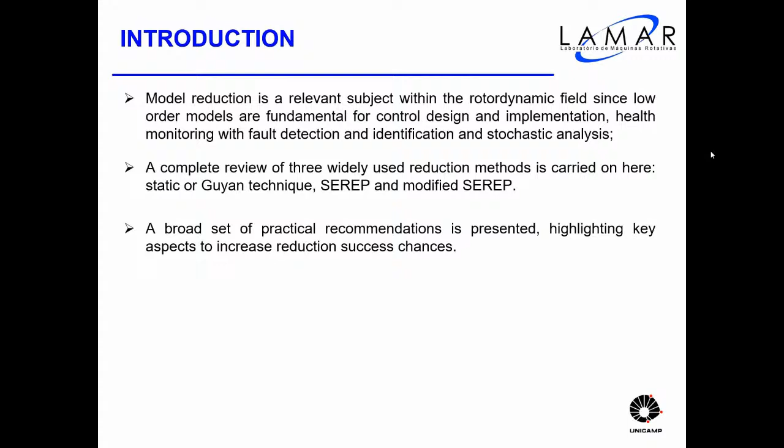Basically, I am going to briefly describe the rotor model by finite elements.

We have some well-known components that are discretized in this methodology. We have here a disk element, usually used to represent gears and blade sets, rotors, and big rotors. This component has 4 degrees of freedom because it's considered a rigid, lumped component. It has practically 2 translations and 2 rotations around these axes.

And we have the translation mass matrix, the rotation mass matrix, and the gyroscopic matrix, related to acceleration and velocity of this component. And here we have the applied forces on it.

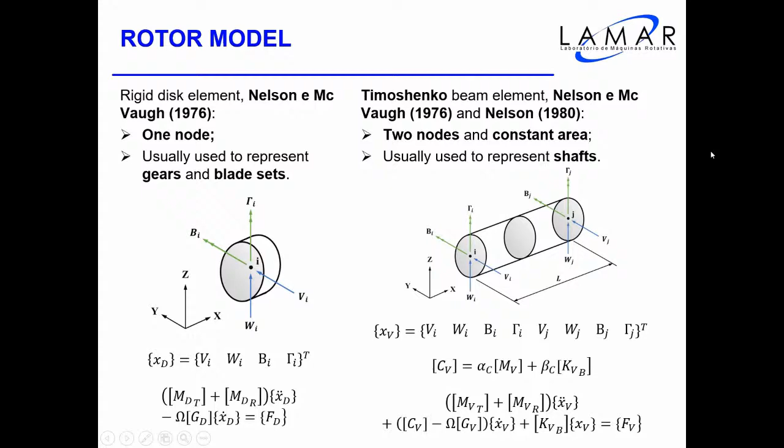Another fundamental component in rotating systems are the journal bearings, or hydrodynamic lubricated journal bearings. The solution of this generally nonlinear problem is obtained by numerical solution of the Reynolds equation. You can get this numerical solution by finite differences, finite volume methods, or finite element methods.

We usually apply the finite volume method developed by Patankar, according to the Maliska method in his book.

However, this kind of component allows some linearization depending on the machine interaction between rotor and bearing. So depending on the behavior of the rotor inside the bearing, you can get some linearization of the hydrodynamic forces, as proposed by Lund.

Then you can represent your lubricant film between the bearing walls and the shaft surface. Here we have the lubricant oil.

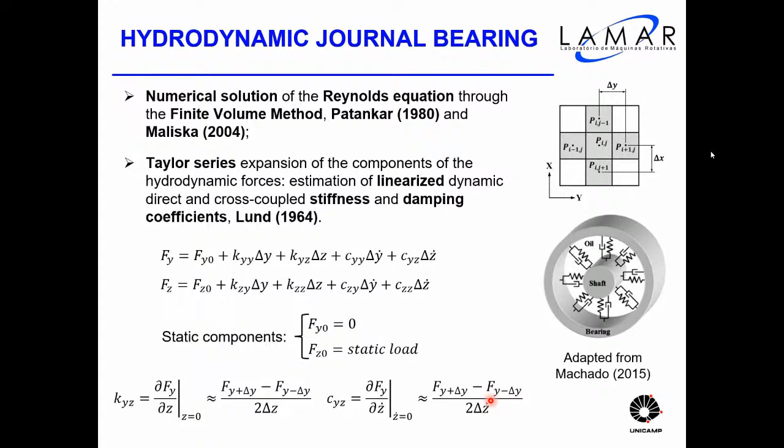Another important and crucial component that's not a rotating component, but is crucial in the modeling of rotating systems, is the foundation. It's composed of metallic parts, usually connected to others - these metallic parts can be of different materials - and usually they are connected to concrete parts. So it's positioned and fixed on an inertial system, an inertial structure.

And even if we can do a very detailed modal analysis of this structure and even obtain its flexibility matrix, as shown here - that is the inverse matrix of the impedance matrix - with mass, damping, and stiffness characteristics of the foundation.

The degrees of freedom that can be sensed by the bearings, mainly the oil film into the bearings, are the translation degrees of freedom. Because in this case, we deal mainly with short and finite bearings, and not so much with long bearings. So the bearings can view or sense mainly the translation of the structure regarding the shaft position.

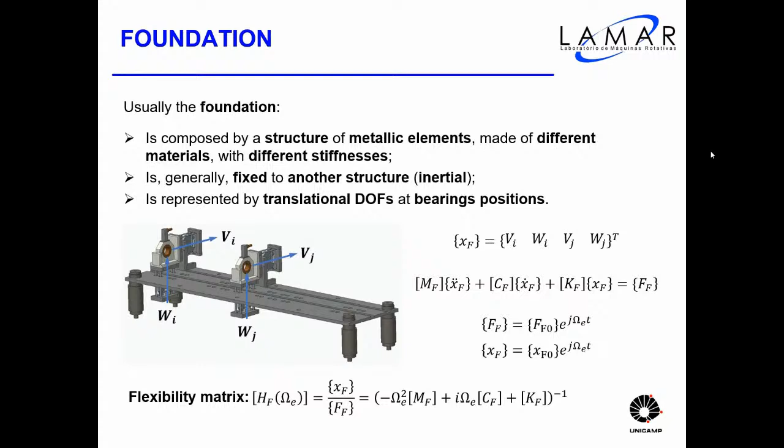In this case, if you have a low number of bearings, it's not difficult to identify a number of structural modes for the foundation equal to the number of degrees of freedom, and then obtain an easily invertible impedance matrix. However, when you have lots of bearings, a greater number of bearings, several rotors assembled in series, you can have problems identifying so many foundation modes as the degrees of freedom related to the bearings.

Practically the double of the number of bearings. So in this case, it's interesting to apply modal coordinates for the foundation.

And here it's a very well-known approach, by the modal matrix. These are physical coordinates and these are modal coordinates. The main contribution of writing the foundation in modal coordinates is to get uncoupled equations of motion of one degree of freedom each, one for each identified mode of the foundation.

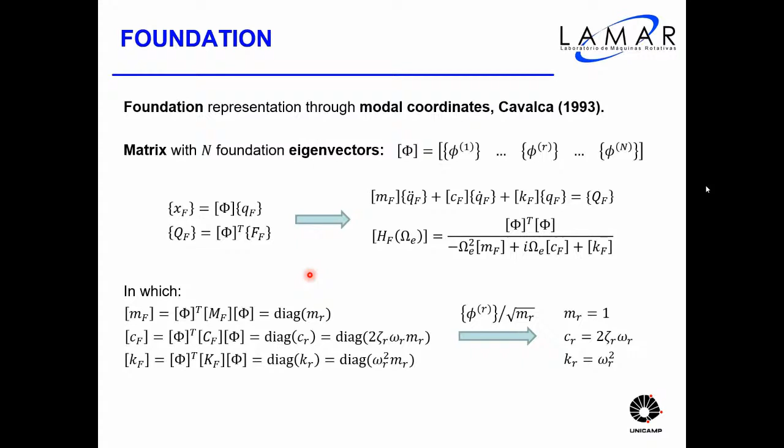Okay, here we have a schematic of a rotor bearing foundation system, complete system. Initially, we split this complete system into two subsystems: the rotor bearing subsystem and the foundation bearing subsystem.

Here we can clearly see the action and reaction forces that go from the shaft to the foundation, and then excite the foundation that returns vibration.

Through the oil film of the bearing, vibration travels from the foundation to the rotor.

Here we have the representation by springs and dampers, the linearized representation of the oil film of the bearings. And here we can see the rotor subsystem and the foundation subsystem, the inertial test rig.

And the main coordinates: axial coordinate X, vertical coordinate Z, and horizontal coordinate Y.

Rotor equation of motion: here we have the translation and rotation mass matrix, the proportional damping matrix, the gyroscopic matrix, and the stiffness matrix.

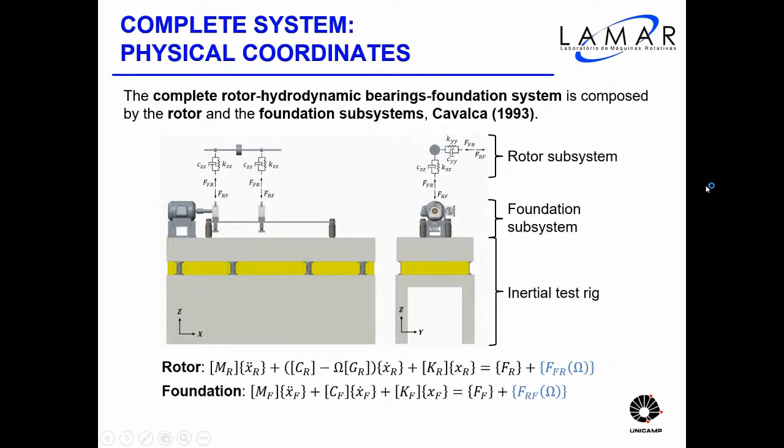The objective here is to obtain a unique equation of motion for the complete system: rotor, bearings, foundation.

So we must represent the stiffness, and analogously the damping matrix, with the translational coefficients, the linearized coefficients of the bearings.

Which means direct and cross-coupled coefficients, in both cases, stiffness and damping. And we have to connect...

...reaction, action and reaction forces through these coefficient matrices. So we have...

...actually, relative displacements between rotor and foundation and between foundation and rotor. So when we assemble these coefficients...

...in this way to represent the action and reaction forces, involving displacements of the rotor translational coordinates and foundation translational coordinates, as well as their velocities, and then we can relate...

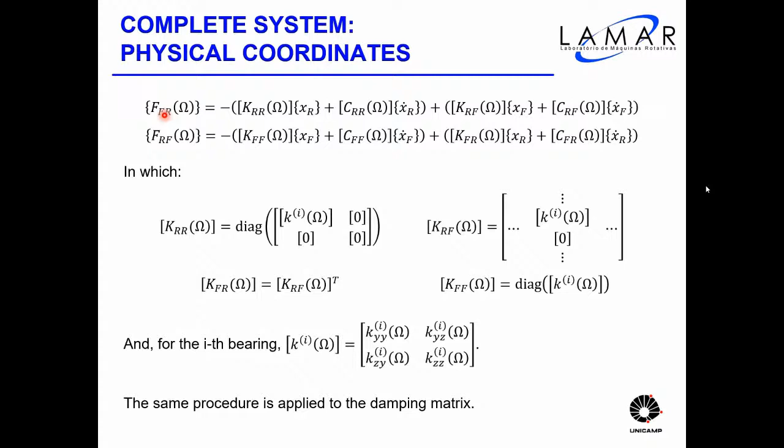After incorporating the respective stiffness and damping coefficients of the linearized oil film of the bearings, we can obtain a unique equation of motion of the complete system.

Its physical or Cartesian coordinates: 2 translations and 2 rotations per node in the rotor system, and 2 translational coordinates in the foundation system.

And then we have mass, damping, stiffness coefficients. This is not exactly damping, it's a velocity-dependent matrix, and the stiffness coefficients.

And here we have external forces acting directly on the rotor and directly on the foundation. However, here we will consider these external forces acting on the foundation to be completely null, so we work only with unbalance effects.

The mass, stiffness, and velocity-dependent matrices are expanded now, containing the rotor inertia, mass matrix, translation and rotation, and foundation inertia.

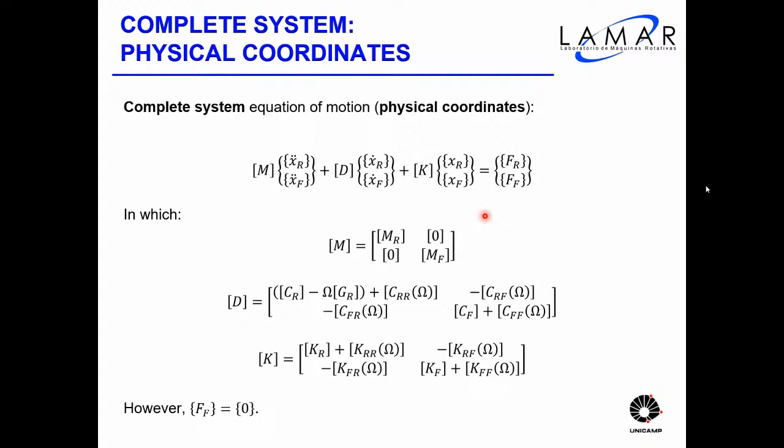Continuing from here, we have the modal approach for the foundation coordinates, physical coordinates, and external forces through the modal matrices. So here we have the generalized forces, modal coordinates, and also the relation between physical and modal coordinates to be applied in the general equation of motion of the entire system.

We will obtain this equation of motion in mixed coordinates, because they are physical coordinates related to the rotor, which are Cartesian coordinates for translations and rotations. And here we have modal coordinates that are related to the number of identified modes of the foundation.

The external generalized forces here will be null. We don't have external forces acting on the foundation, only transmitted forces by the bearings, included here as we can see by the stiffness and damping coefficients, equivalent coefficients to the lubricant film of the bearings.

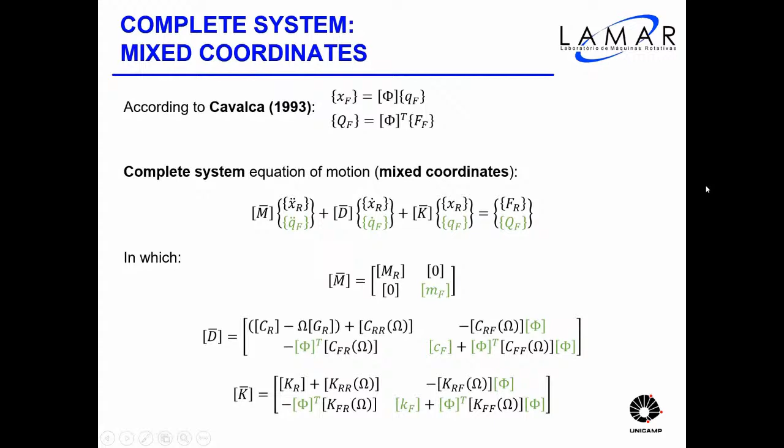Model reduction of rotating system. The objective is to provide a reduced order system, still maintaining the physical interpretability and satisfactory accuracy of the response of the complete system. We can't lose vibrational information of the system.

And the motivation is the computational savings for such kind of analysis, for example stability analysis, real-time control strategies, and so on.

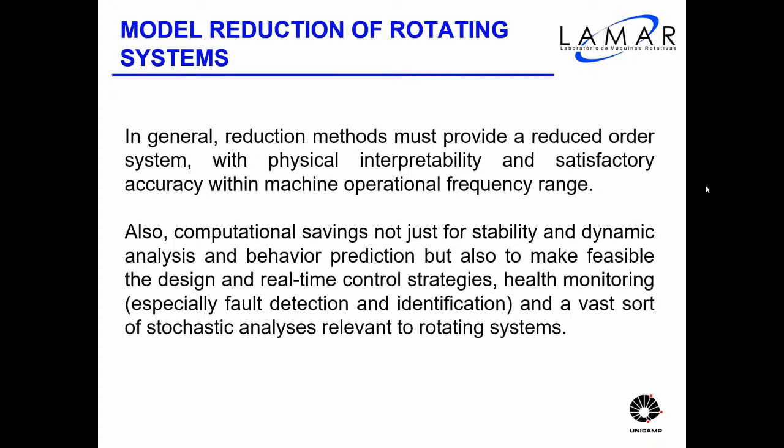Starting from the static or Guyan method, also known as static because it uses only stiffness properties for its approach. It's the most used and widely applied method for reducing orders of systems, and it only accounts for the stiffness effects.

Guyan reduction assumes that inertia effects and damping effects can be neglected regarding the stiffness effects, which are much more important and expressive in the system. That's why it's good for structures and a little bit limited in rotor dynamics, even if it can be used in some situations.

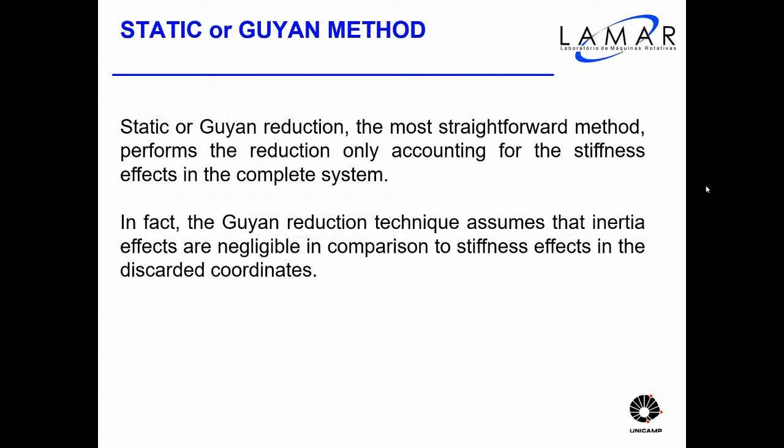So the Guyan method basically depends on the matrices reordering, according to active and discarded degrees of freedom. So here we will take the rotor finite element model stiffness matrices and multiply by the respective degrees of freedom displacement vectors and equal to external forces.

So inertia and damping effects are completely disregarded, and gyroscopic effects are completely disregarded. Then we reorder active and discarded degrees of freedom here.

And in function of that, we will reorder the stiffness matrices. And as I said before, on discarded nodes, no external forces must be considered. If there is an external force applied on that node, it is an active node and not a discarded node.

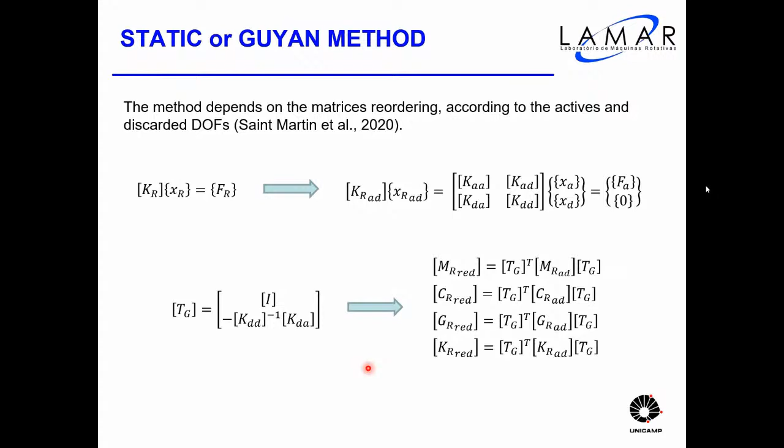The SEREP method is also applied on structures with significant inertia effects in its dynamic response. This method, the system equivalent reduction expansion process, uses the vibrational modes, namely the eigenvectors, from the undamped complete model to generate the transformation matrix. We take the mass matrix and stiffness matrix of the finite element model of the rotor and apply the SEREP reduction.

Here we are going to pay attention to the modes, the modal vibrational modes of the rotor itself.

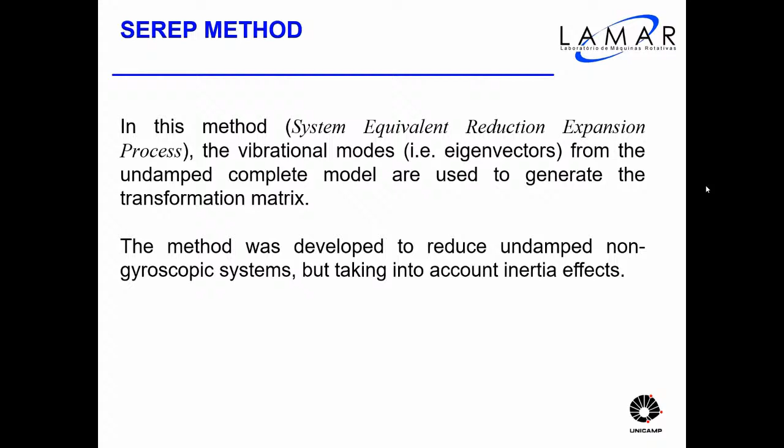Initially, it's important to point out that if the global mass and stiffness matrices are not symmetric, the complete eigenvalue problem leads to a diagonal matrix of eigenvalues, lambda, and two distinct right and left eigenvectors. The order of these matrices will be n, the number of degrees of freedom of the finite element model of the rotor, so order n.

This method attends to the inertia effects and also stiffness elasticity effects, so we have acceleration, displacements, and external forces. Again, we have to select active and discarded degrees of freedom, taking into account all the recommendations we considered before.

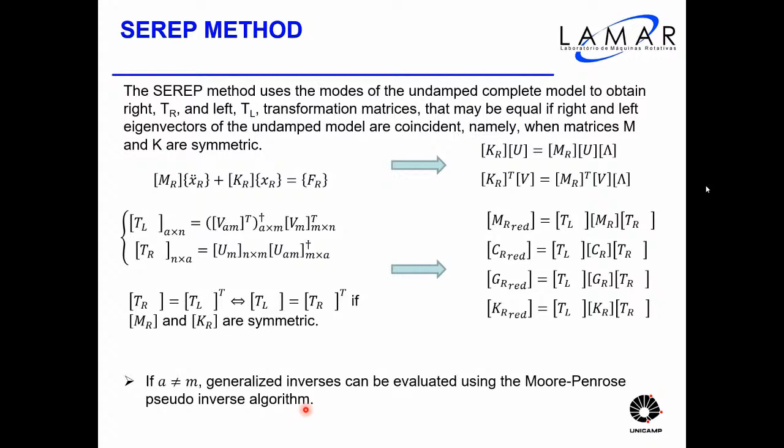The main reference about this modified SEREP method is given here. Again, the transformation matrix involves the right and left eigenvectors, and we have to select A, active nodes, and D, discarded nodes. These nodes must be selected between the rotor number of degrees of freedom by finite element methods and the foundation degrees of freedom.

So the M vibration modes of the entire system must involve rotor modes and foundation modes, and it's interesting that this is minor than the number of degrees of freedom of rotor and foundation together, as it's the reduced model. The complete and reduced models must be quite equivalent when the number of active degrees of freedom are equal to twice the number of modes, as it is written in state space form.

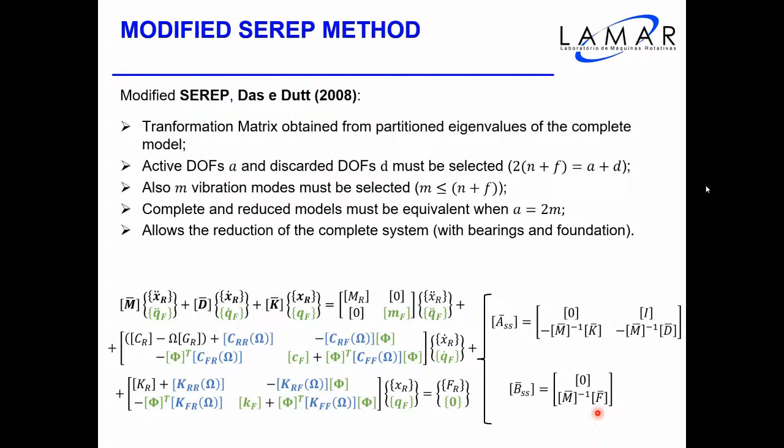Giving continuity to this method, we have the state space representation, and the z vector here involves displacements in physical coordinates for the rotor, in modal coordinates for the foundation, and the corresponding velocities. So we have the dynamic matrix and the external force matrix, and here the transformation matrix.

The transformation matrix involves right and left eigenvectors, and also regards the relation between the active degrees of freedom selected and the number of modes selected. The calculation of the transformation matrix is practically the same, so it can involve a pseudo-inverse as before.

And here we have the transformed dynamic matrix and force-related matrix, external force. The method is then rotation speed dependent, but the model reduction is completely in state space, which restricts the visualization of an equivalent mass spring damping system and even gyroscopic effects in an equivalent system.

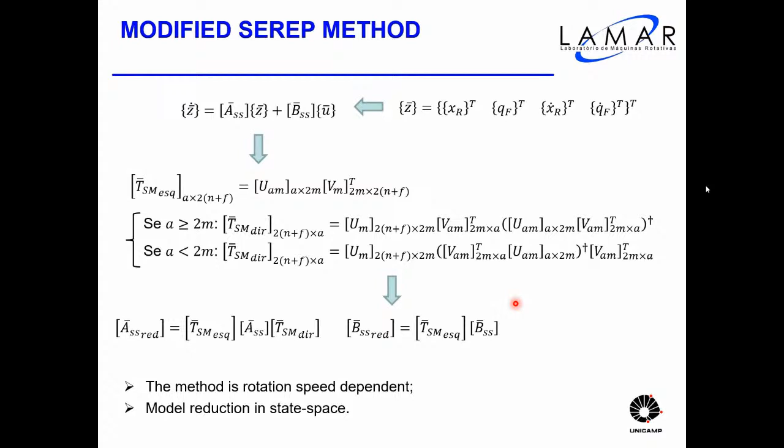Regarding the modified SEREP, a second order system extraction for reduced state space representation was developed in the sense that you can split the reduced matrix for rotor, bearings, and foundation. This can be very interesting, as you already have the reduced model of the foundation, and you can reduce the rotor model only once.

Instead, in the state space, you have to process the entire system reduction at each rotation speed. So it's interesting to decouple these components again for some particular cases of analysis, for example time domain analysis, non-linear analysis, when you would like to see the physical correspondent system matrices separately.

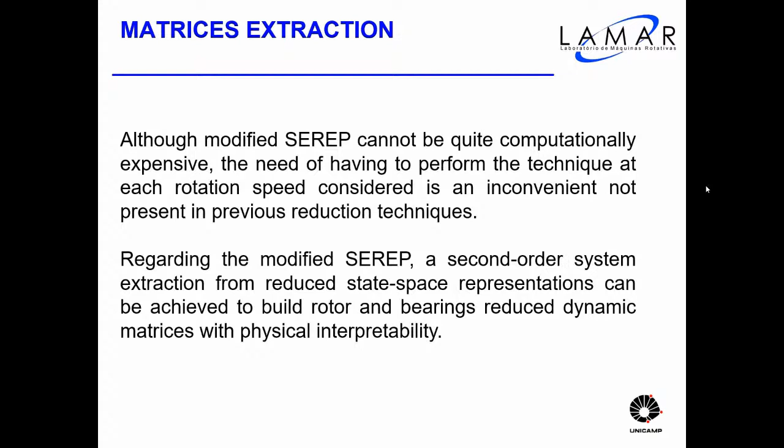The main conditions for matrix extraction are: the complete dynamic matrix must be the sum of rotor, bearing, and foundation dynamics, and the active degrees of freedom number must be even. So we have this situation.

We can obtain the state of the complete system and the three dynamic matrices separately. Going back from this representation, we have to test this in the complete system first, and then we can go ahead with the partial reduction of each system once we have the complete reduction.

From the complete reduction of the rotor bearing foundation system, we get this matrix here, and with this matrix here, we can obtain the partial reduction. For example, from the foundation, using the terms of the complete reduced dynamic matrix, we can obtain the reduction for the bearing stiffness and damping, because this is known. And the same for the rotor.

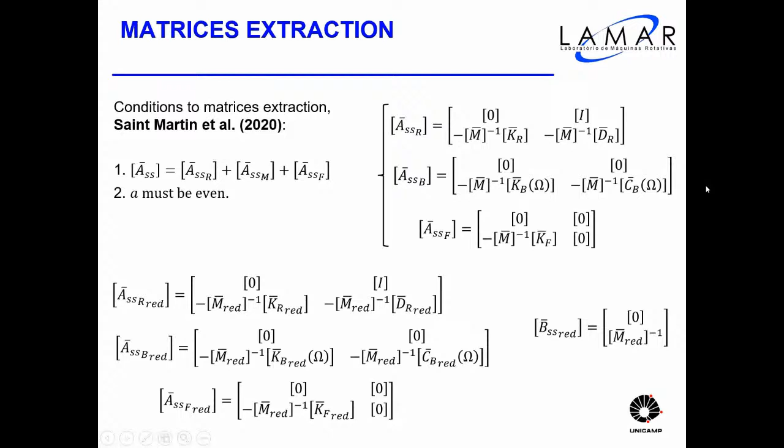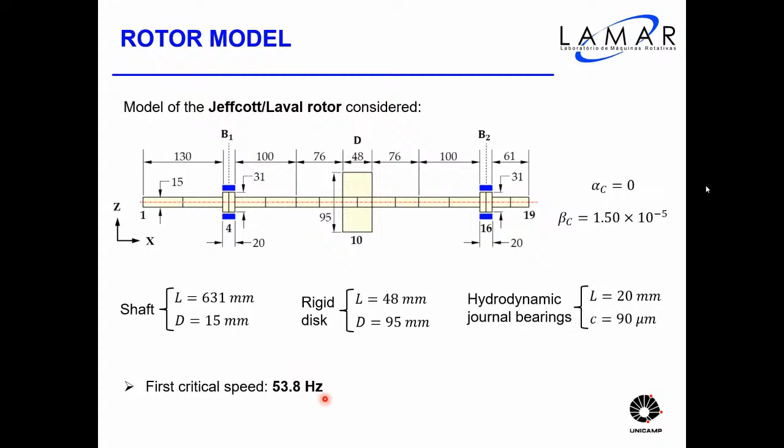Now let's apply the theory previously discussed to a simple Jeffcott Laval rotor. Consider these dimensions, proportional damping to the stiffness matrix, hydrodynamic journal bearings with these dimensions, and the shaft length, diameter, and rigid disc. The first critical speed of the system is 53.8 Hertz.

Going ahead, flexible foundation: we have an experimental flexible foundation. It's a flexible plate, and the bearings and the rotor we simulated before are placed here, in the left end of the foundation. So here we have axial, horizontal, and vertical Cartesian coordinates.

Some dimensions of the foundation, just to be clear: 12 millimeters of thickness here, this thickness here, 1.18 meters here, and 0.29 meters here. So the hollow pillars are these ones, connected at the four extremities of the plate.

Here we have some measurements from the accelerometers. This 7th accelerometer is placed on node 12 in the Z direction. Then we have amplitude and phase for the first, second, and third mode of the foundation separately. So here we proceed with an experimental modal analysis of the foundation, and got these values.

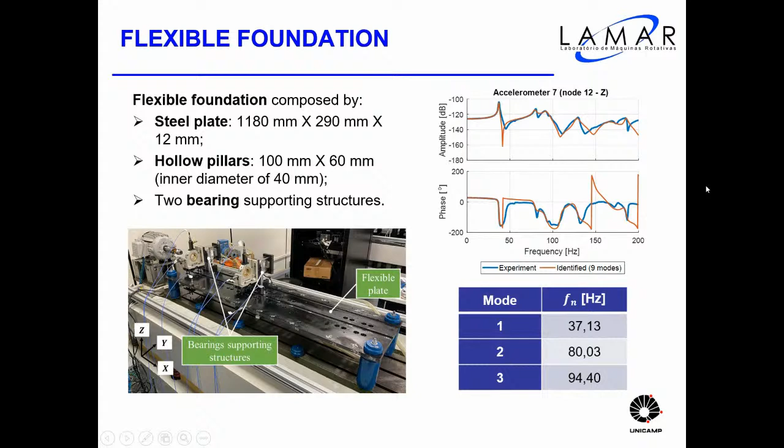First step: put the foundation into the rotor model via modal coordinates. Here again is the first flexible mode. Here we have the torsional mode of the foundation - it's not very expressive, this one is much more expressive. And here we have the second bending mode of the foundation, also more expressive than the torsional mode.

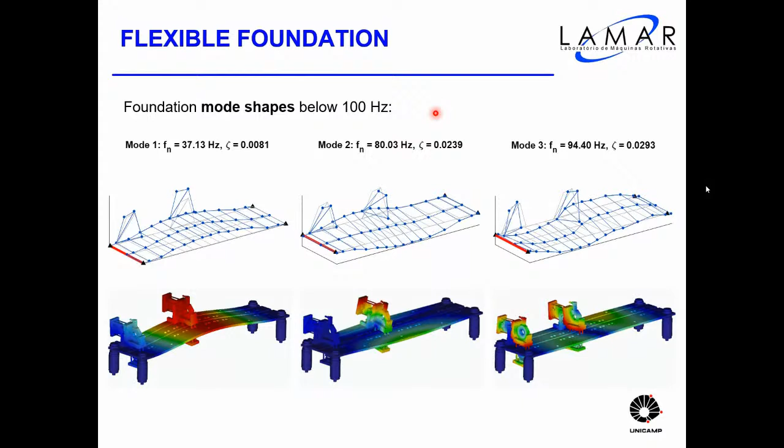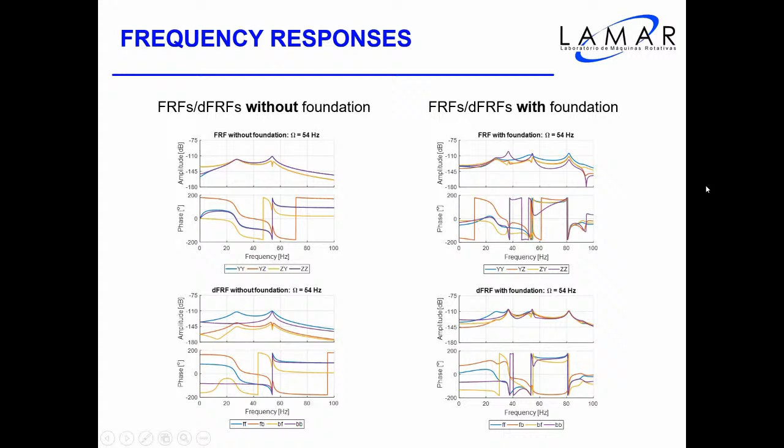Now, when including foundation, we can see the three foundation modes not dependent on the rotation speed, and it also splits the first bending mode of the rotor, creating two very close backward and forward critical speeds. When exciting the first, second, and third mode, this practically did not appear, it's too damped. It practically does not participate in the rotor frequency response, but we have these two, as we said before, and the rotating speed that also appears in the frequency response function and directional frequency response function.

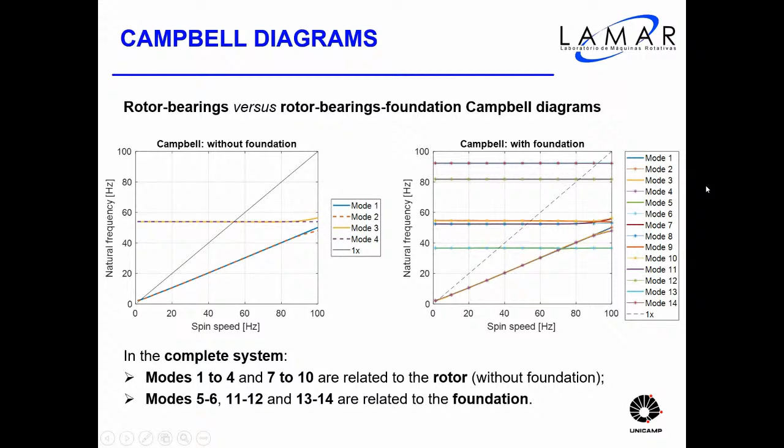Now we are going to put some reinforcement here on the foundation to minimize the vibration amplitudes, because we are going to test a different rotor with an expressive inertia and gyroscopic effect.

So we will consider 76 degrees of freedom for the rotor, and 3 modal degrees of freedom for the foundation, which means 79 mixed degrees of freedom for the entire system, rotor and foundation. The reduced model by all methods presented here will consider 9 mixed DOFs, degrees of freedom, around 11% of the complete model representation. So we will take 6 degrees of freedom for the rotor, 2 translations related to the bearings, and 2 translations at the disk, and the foundation, obviously, the 3 degrees of freedom related to the identified modes of the foundation.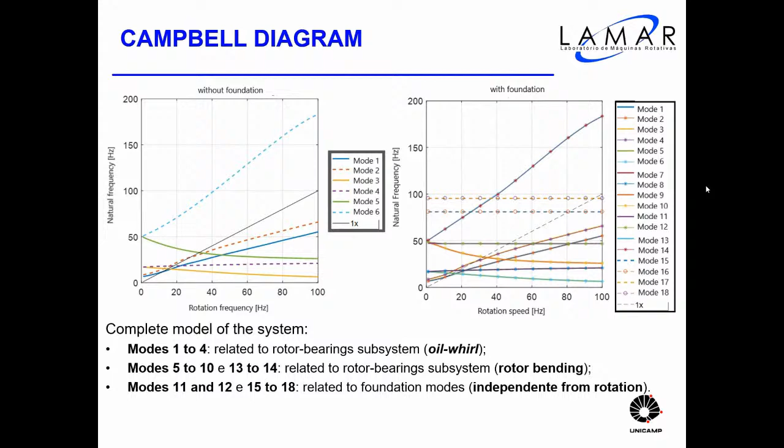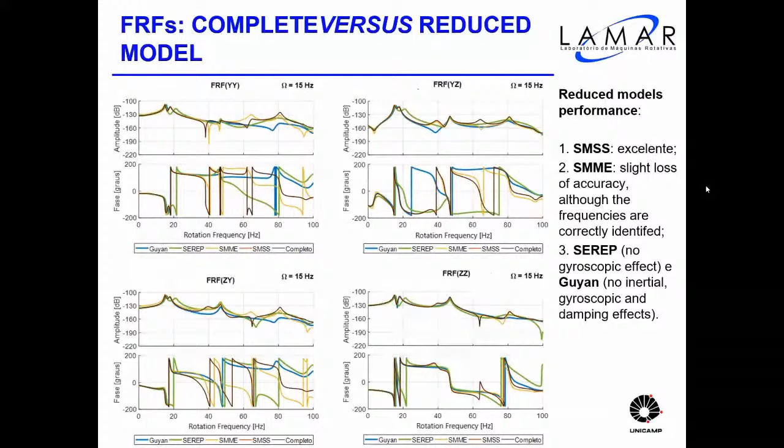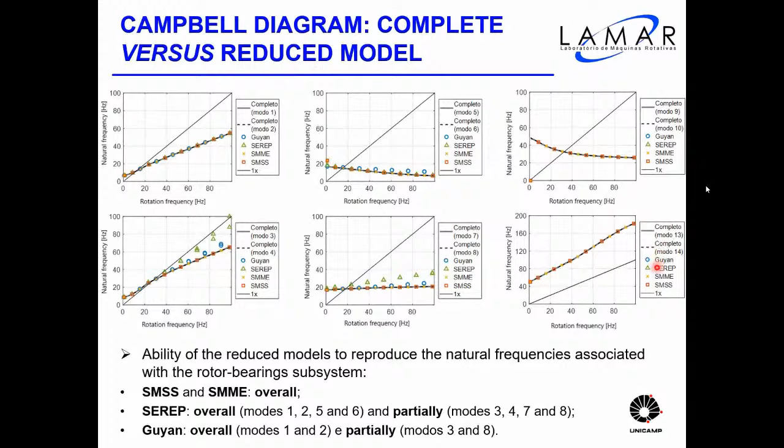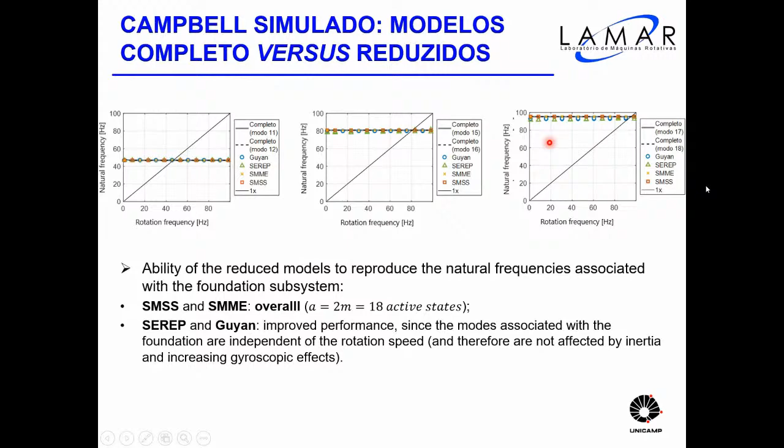Considering here the foundation modes, all methods, as expected, are capable of representing the foundation, because the foundation is not dependent on the rotation speed. However, you can see that even for high modes of the foundation, they can also lose accuracy.